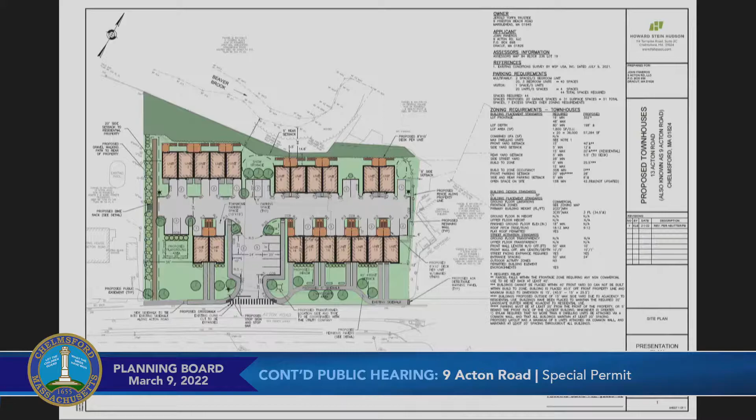The other thing I wanted to touch upon was a concern raised at the last meeting about whether we're still in good standing, from a tolling standpoint, with our determination of applicability. I'll submit - I've got a couple of copies I can submit now for the board. Basically, if you look at when the board determined applicability, it was in February of 2020.

If you go to the bottom of that decision, it says this finding of applicability shall be valid for 2 years. So February of 2020, 2 years takes us to February of 2022. So that's the 2 years.

The finding of applicability will be valid for 2 years from the date the board votes this decision, February 2020, within which time frame the applicant must submit an application for final approval. So we would have had to submit the application for this project by February of 2022. We actually submitted it in September of 2021. So that takes care of that issue.

Now, we could go into a whole thing of tolling, even if we did it after that, but I don't think it's applicable. I borrowed some of Paul Haverty's statutory references to the tolling, but again, we're not even in tolling. We're within the 2 years, since we applied prior to February of 2022.

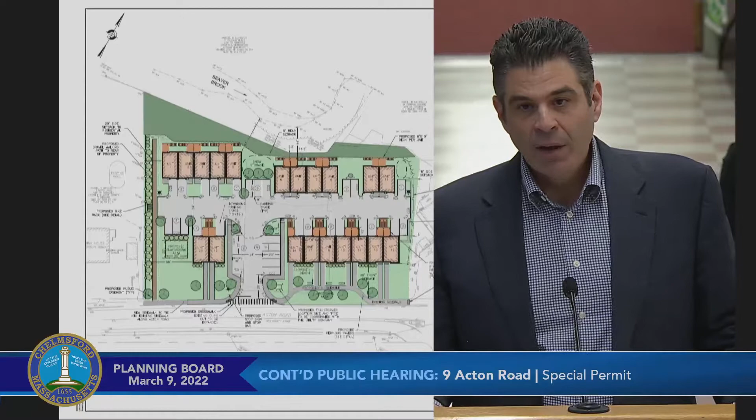Sounds good to me. Anybody else? Any questions on that specific item? No, I think we're all good on that.

All right, so why don't I let Katie come up, walk you through, you can hear if there are any abutters, and then we talk about where to go from here. Thank you. Thank you.

All right, good evening everyone. Katie Enright with Howard Stein Hudson. The first plan in your packet is the first plan on the screen. This is the plan that we submitted at the last meeting and discussed at the last meeting.

I kept it in here just as, I think they're talking back there. Okay, just to make sure that we can have a reference as to what we're going to and what we came from.

At the last hearing, we heard comments related to snow storage, parking, and also the number of units. We also heard that the residential property setback to the rear units, we still had those at 20 feet, where we had moved the front units to 56 feet away from the Fitzgibbons property, which was problematic in the back. So we went back to the drawing board and came up with the plan that's shown here.

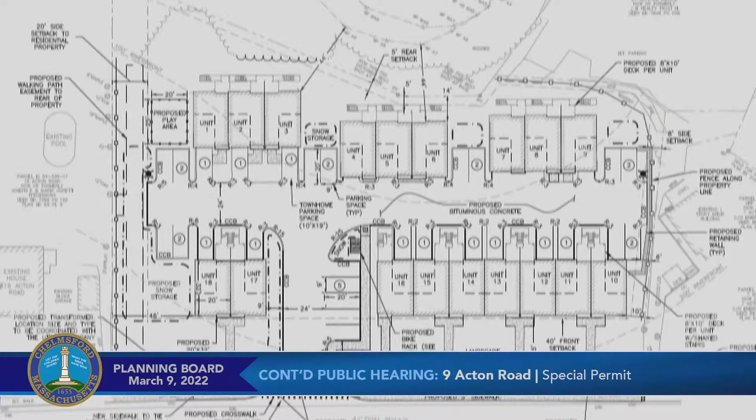This is an 18-unit plan. Sorry, it's not as pretty as the first one and colored in. It's right there, right in front of you. It's page 2, the second one in your packet also.

So this plan dealt with some of the questions and issues we had at the last meeting. We've reduced the number of units to 18 units. That was something we heard from multiple members of the board regarding density. At a previous meeting, we had heard that the units seemed small.

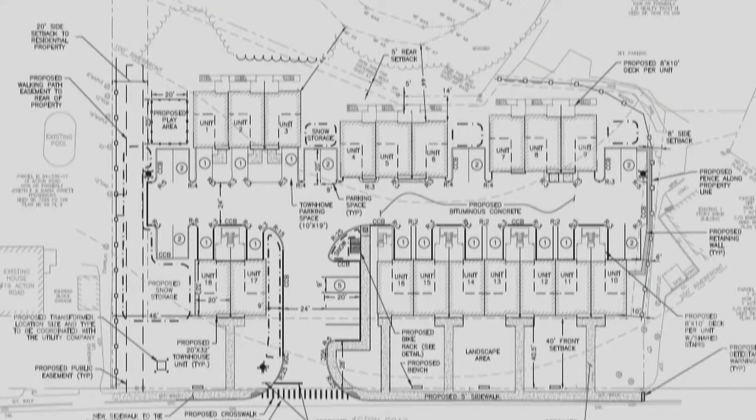So what we were able to do in incorporating the other comments was look to add about 2 feet in width. That adds a little over 250 square feet to the living space of each of these units. That brings us from a previous living space of about 1,367 square feet, not including the garage, to 1,620 square feet of living space, not including the garage.

The garage itself is a little bit bigger too, because essentially the units were already 32 feet in depth and 18 feet wide, and now each unit is 20 feet wide. But we didn't just go to 20 feet wide. We had to really work on what that meant for setbacks to our residential abutter to the west, and also what that did to snow storage, parking, and the area of the playground, et cetera, throughout the lot.

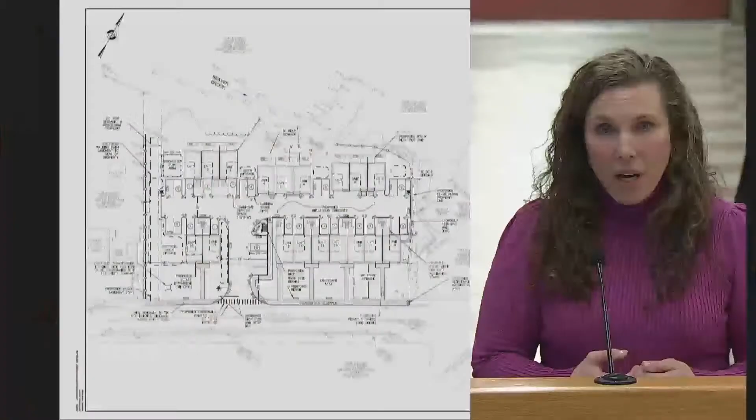So we kind of backed into the 18 units and the 20 feet wide, really trying to maximize that front and back setback to the residential abutter to the west. So this plan shows 48 feet on both the front and the back unit.

On that side, we've left the easement in place for the walkway, as that's part of your master plan for the center village, to have that walkway there, but we heard from the board we're not really ready to extend it anywhere quite yet. So we'll leave the easement in place, but that area essentially becomes green space in addition to the green space that was already on that side.

We're able to extend the snow storage right around that corner. We moved the playground back to the rear, but it's significantly further from the brook than the previous location, and the playground is intended to be fenced, so you can see how that sits now next to unit number 1. It's the same size—actually a little bigger, I believe, than the previous one. This is a 20 by 25 foot fenced-in space.

We also were able to better distribute the parking, and the parking next to units 4 through 9 would have reserved spaces next to them. They do have one garage space inside. In the plans we'll submit, developed further after this meeting, each of those will be signed as a reserved space for each of those units, and it's the secondary space for each of those units.

There's also additional parking on this plan, so the parking requirement is 40 spaces that are required. This plan has 46 spaces, so we have 6 excess spaces over zoning requirements on this plan.

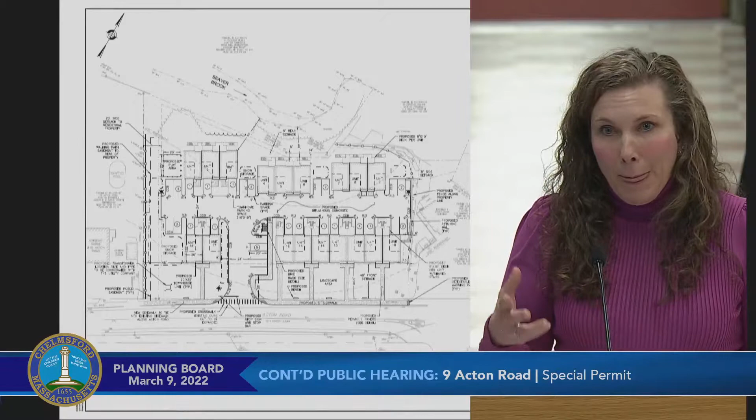Thank you. Oh, I'm sorry, I'm very sorry—there is also new architecturals that we submitted that are in the plan set. I almost forgot. Let's see if it'll let me move forward. It's the next plan in the set, the pretty picture of it. It's not gonna let me move forward right now. Oh, here, let me try this.

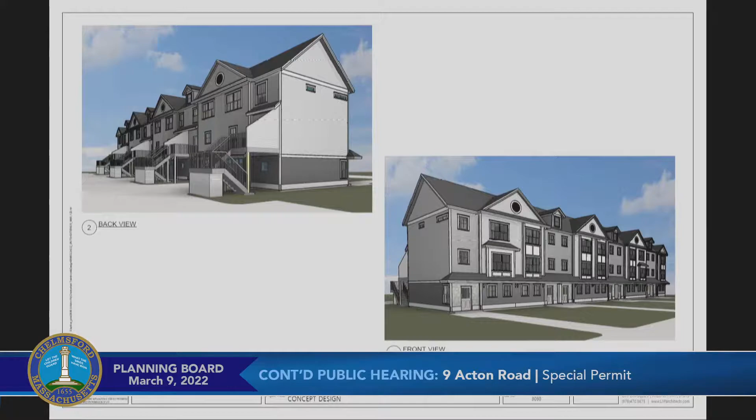All the plans here show the layout of the new 20-foot wide units, and it shows the transom windows on all units. It made sense to do that when the architect spoke with our client—they decided on all end units the transom windows would allow sunlight in, but not allow people to look out at one another or onto their neighbor. So that's just a pretty picture of what that would entail, and all the plans behind there are the additional plans submitted as part of that. That is the end of my presentation.

All right, excellent, I'll bring it around the board. Mike? First of all, I'd like to say thank you—you've addressed all of my issues with the project, so I think it looks good. I just have a couple of questions.

You can clarify - along the neighbor's property to the west, are we leaving all of those mature trees in place? What's the plan for that? Yeah, they're actually off of our property, so all that will stay.

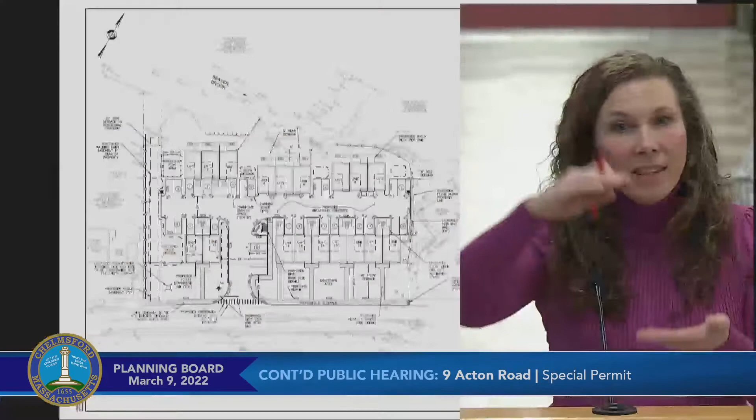And you're replacing a fence there, my understanding? And we're also putting in arborvitaes on our side of that fence to help with the leaf cover from the other side and the top of the fence.

And then this is down the road, the units that have the transoms at the top - is this going to be a homeowners association, or a condominium rental? Yes, it'll be a condominium.

So is it written in there that they cannot improve their home and build in full-size windows 5-10 years down the line? Is that written into the deed of the home? Yeah, the condo docs would prevent any unit owner from modifying the exterior of their unit - they cannot change the exterior.

The other thing I should have mentioned is how we're going to handle rubbish. We talked to a private rubbish company - they would supply enclosed bins. With the added width of the units, there's room now to keep those bins in the garage. So we would put into the condominium docs that the rubbish bins couldn't come out until the night before trash is due to be picked up.

So if trash is picked up on Wednesday, every week you can bring your barrel out Tuesday, but that's it - it has to stay in the garage, so we prevent barrels from falling over and rubbish from going over. I think that was important to the condo association in the back, and I'm sure to the Fitzgibbons as well. So that's how we're going to handle trash - with a private company, and write that into the condo docs.